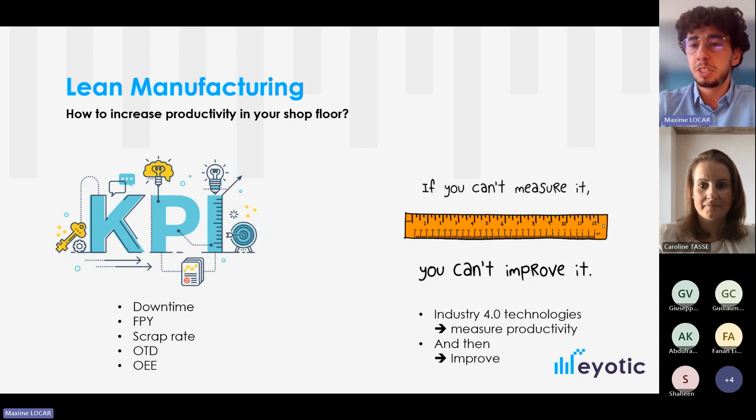As in the lean manufacturing method, the first step is always to measure the KPIs. We can't improve if we don't measure the KPI first. For this, I will use different examples that I saw in production in France and in Europe of measuring performance and improvement of performance in the shop floor using different Industry 4.0 technologies.

Concerning these technologies, I'm sure you know Industry 4.0 covers many different types of technologies, but today I will use these examples. I will speak about artificial intelligence, about robots and automated assembly lines, IoT and connected tools, and also camera visualization for quality checks and things like that.

So first, the first KPI I will explain is the downtime. As we can see here, the downtime is a stop during the production process. There are different types of downtimes.

We can separate them into two different types: the planned downtime, like breaks or planned maintenance, and the unplanned downtime, like a problem, a lack of material, a broken part, or something like that. This type of downtime is more complicated to measure and to improve, so it is on this type that we will focus today.

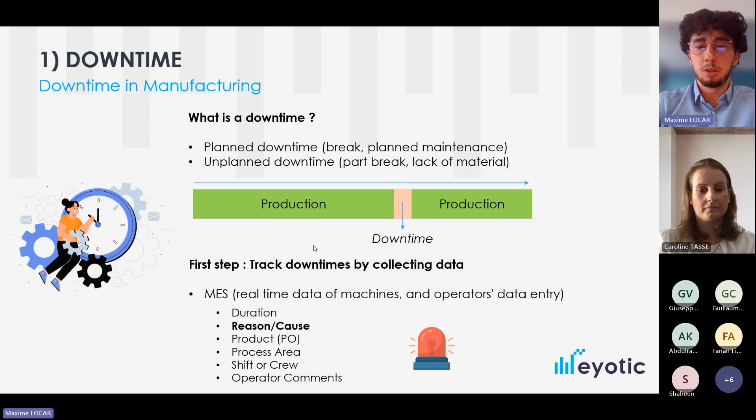But the method of lean management is here: the first step is to collect the data, so we can then monitor in real time and visualize it on the shop floor, so we know this machine is working, this one is not, and why. By collecting this data, the MES becomes a big database, so we can analyze it and understand the true problems of the shop floor.

By using an MES, you can really know where the leaks of productivity are in the shop floor, and you can analyze that and make good decisions to improve the process. The goal will be to anticipate future leaks of productivity and future downtimes by using predictive maintenance to prevent them and continually improve through these methods.

So this was about the MES. To go further, the goal is to connect the MES to different Industry 4.0 technologies like robots, IoT sensors, or video analysis. This allows people to have better data, and the better the data, the better the analysis you can do, because the goal is really to know the truth of the workshop.

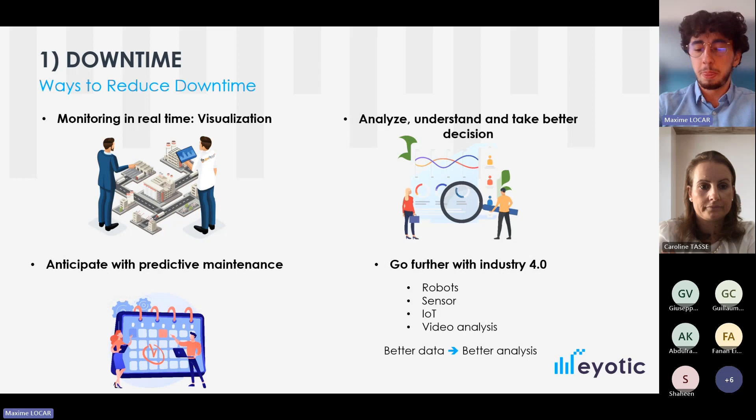But I will use a concrete case, which will be really good for you to understand this. I will speak about one of my customers in France, a crane manufacturer. For them, we were doing an Industry 4.0 project to connect a machine, an old welding machine with a PLC from about the 1980s.

On this machine, all the downtime was collected only manually on paper. Our project was to use an acquisition box to connect this machine to our MES. The first goal wasn't to measure downtime, but to measure intensity and have real-time data like we can see on the screen.

But we were here, so we also added the measure of downtime automatically because we were connected. So these customers can actually know in real time the downtime of these machines. By using paper and manual downtime tracking, they were expecting a production rate of 80%.

In reality, by connecting to the MES, the production rate was about 60 or 70%. By being connected and having the real data, they saw the reality was not what they thought before. So they had to adapt and analyze where the different leaks of productivity were with the MES, and they saw that the principal leak was during material supply, when the operators wait for materials.

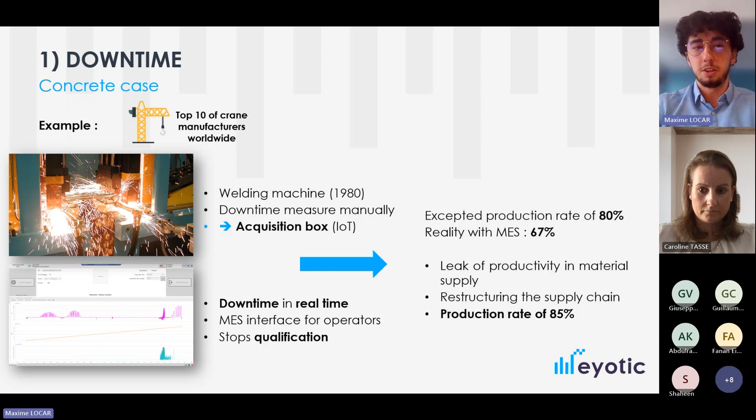Of course, the quality check can be really different, depending on the final product. It can be a weight measurement, a dimension, a composition. It can really be a lot of things, depending on the final product.

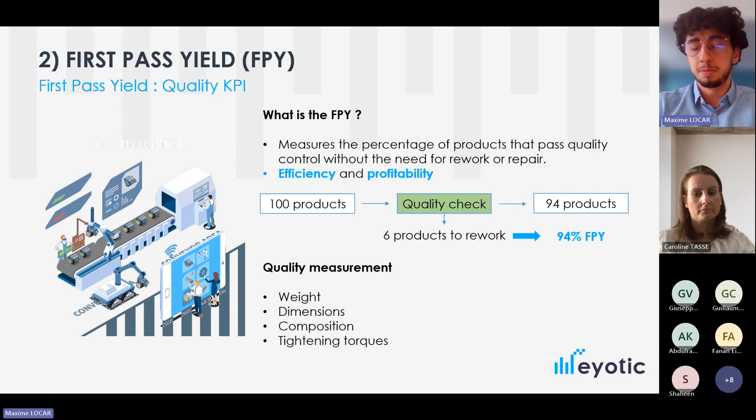To measure it using different Industry 4.0 technologies, there are different steps. The first step can be to connect with the MES and have a quality check done manually but digitally, like in the photos here, where they can directly type in the quality check. But you can also connect the MES to other technologies and go further into the details.

I want to give an example of a customer who asked us to connect this type of connected torque wrench to the MES to automatically process the quality checks. The MES also directly knows the data from these tools, and it's better—it's faster.

There is also a side benefit—not directly improving performance, but still a benefit from using this type of process. It's for traceability. By using this type of technology, an industrial company will know at the end of production that this operator screwed this bolt at this torque, at this time, and the bolt came from this supplier. All the data collected during the process will be stored in the MES and accessible anywhere, anytime. So traceability isn't a direct improvement of productivity, but it's also a benefit.

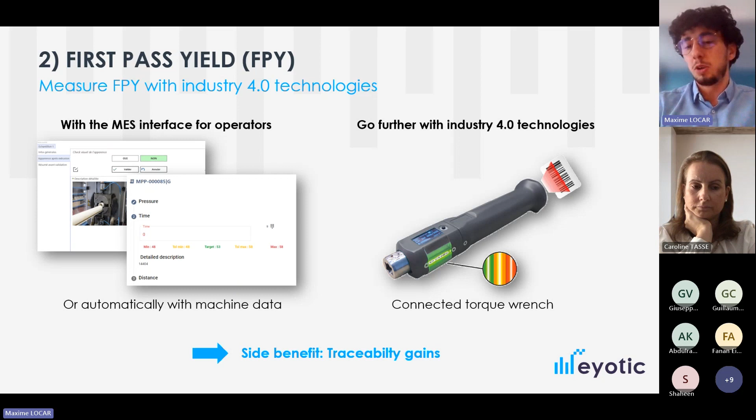To finish with this KPI, I'll use a concrete Industry 4.0 case. It's again one of our French customers, a military company manufacturing boxes with explosive powder inside. It's a big automated assembly chain, and they have to do quality checks on the weight of each box.

When we were there, there was a project for a robot that automatically weighs each box and directly sends the data of each quality control to KM Prod. In the MES, we can see all the different checks, with different alerts when the quality check isn't good.

There's also a direct alert, and the goal is really to prevent problems before they happen by seeing trends. We can see here the blue line showing a trend that the weight of each box is increasing more and more. At a certain point, the MES will directly send an alert or stop the production process before having a scrap or a problem.

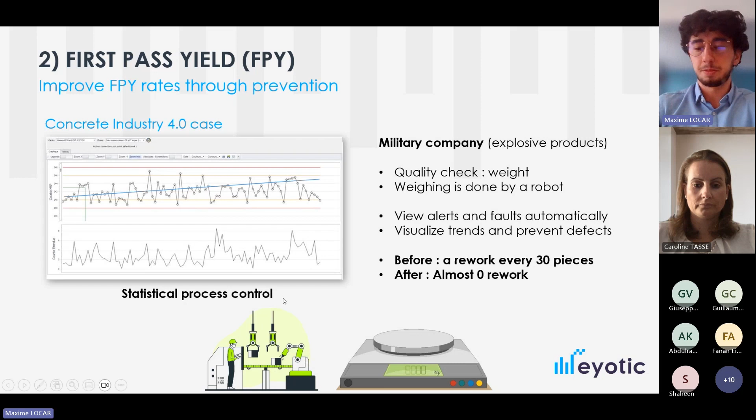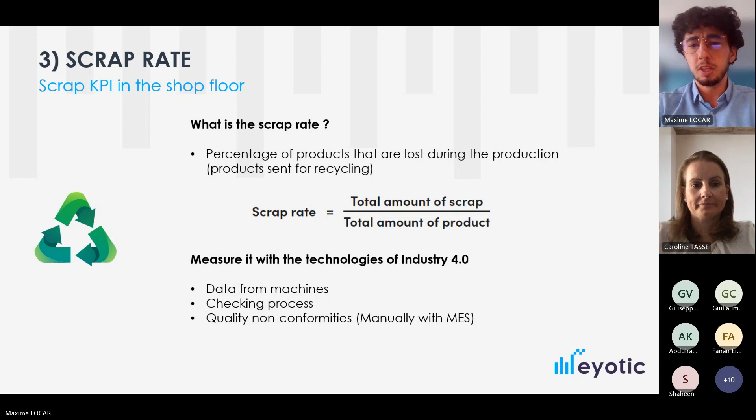Now I will speak about the scrap rate. It is the next step of the FPY. The scrap rate is all the products which are lost during production and which are going to be recycled. We can measure it in different ways, but with Industry 4.0 technologies we can go further.

The first step would be to have an MES and an operator that directly and digitally types the data of different scrap validation.

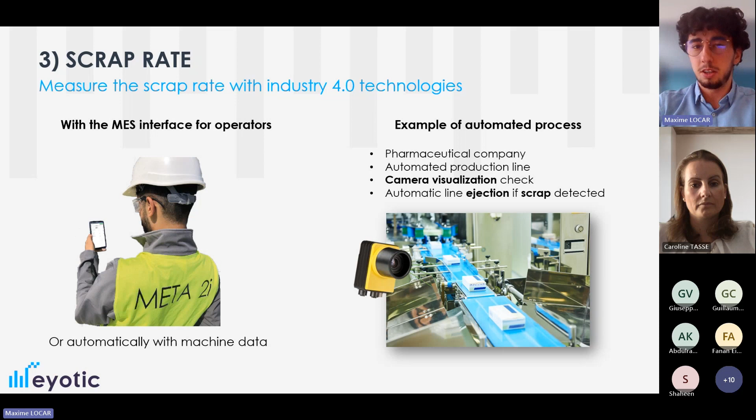But we can go a lot further, using the example of a pharmaceutical company in France which has an automated production line. On the line they have different intelligent cameras with visualization, and the goal is to do the quality check directly from the camera. The camera checks if the barcode is good, and if the quality check doesn't pass, the product is automatically passed out and scrapped. So the quality check was totally automated in the process, but again all the data is stocked in the MES to analyze later.

I want to use another concrete case to explain how the scrap rate can be improved with different Industry 4.0 technologies. I'll use the example of a water jet cutting company, also in France, where our product was being implemented. There are a lot of things to do, but they know they have a really big scrap problem because they are using titanium parts, which is a very expensive material, and the cutting process by water can be very long.

So they can't always have a person there to verify that everything is going well. They need water but also abrasive in the machine, and if the mix isn't good, the piece will immediately be wrong and go to scrap, which is really problematic because titanium is really expensive.

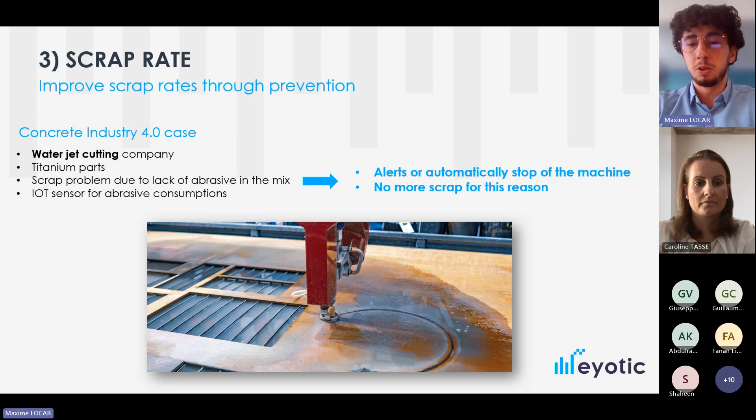So what we did is use an IoT sensor directly in the machine to know the quantity of abrasive in the mix. If the sensor detects there will be a problem, a lack of abrasive in the mix, automatically there will be an alert to the manager of the workshop. And if the problem isn't resolved by the manager, the machine will be stopped by the MES upon receiving the information from the sensor. So there is no more scrap for this reason. It's a really good thing for this customer because it was a really expensive problem for him.

Now I will talk about on-time delivery in Industry 4.0. On-time delivery is a KPI that lets us know if we are on time with all deliveries and if the planning is going well. Again, there are various different ways to measure it in a workshop.

It can be done with an MES or a scheduling module in general, where the goal is to plan all the POs from the MRP to create a sequence of production that will be distributed to posts for all the operators, who can then launch it in production. During production, we check the beginning and end of all operations, so we can know in real time how it's going and if the scheduling is good or not. It is the first step, but we are doing it for a lot of customers.

We can use an artificial intelligence motor and connect it to the MES to go further and have intelligent scheduling. The goal is to be more efficient in creating the sequence of production in different ways, by being better at procurement, material supply, operator productivity, or other data depending on the customer's needs. The goal is to be more efficient in creating the sequence of production using artificial intelligence, aiming for continuous improvement, because the motor will learn more and more along the way of production.

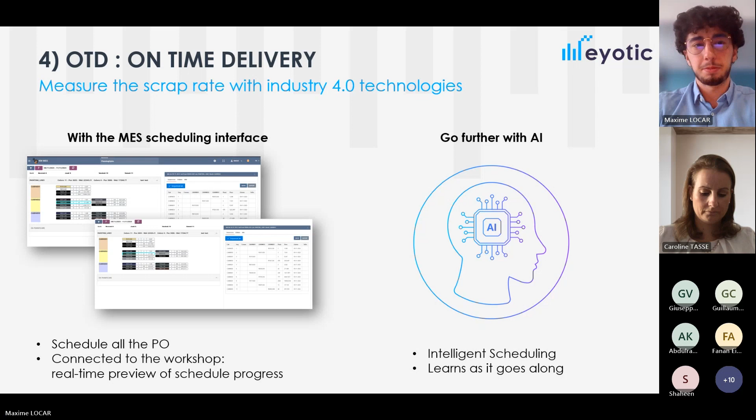Before using artificial intelligence in scheduling, the on-time delivery and the delivery time told to customers was about 5 weeks, because in reality they didn't know in real time how production was going, so they told everybody 5 weeks for each product since it was simpler.

The first goal was to use a scheduling module without artificial intelligence, so they could know in real time if there was a problem in production or a lot of work to do. With this, they saw that in reality the average delivery time was about 3 weeks rather than 5, with the same OTD, just by measuring it.

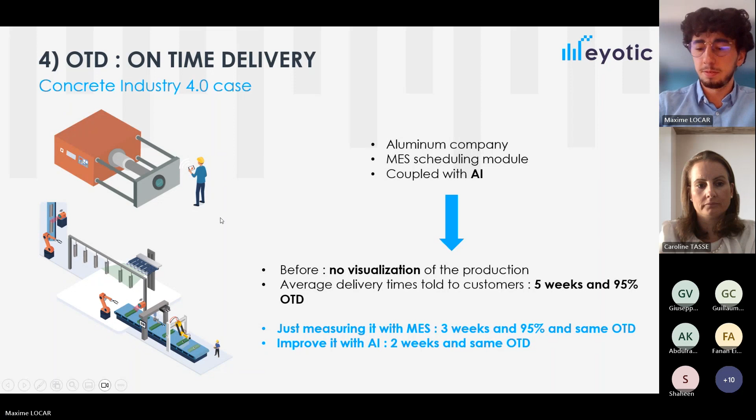To finish, I want to talk about OEE, because as you probably know, OEE is really the global KPI of performance for a factory, and all the different KPIs we saw before lead us to this KPI. As you can see, OEE is about availability, performance, and quality.

It's also very important to say that OEE is not only for machines; it's really the overall equipment effectiveness, so the people and the different equipment in the workshop also influence the OEE.

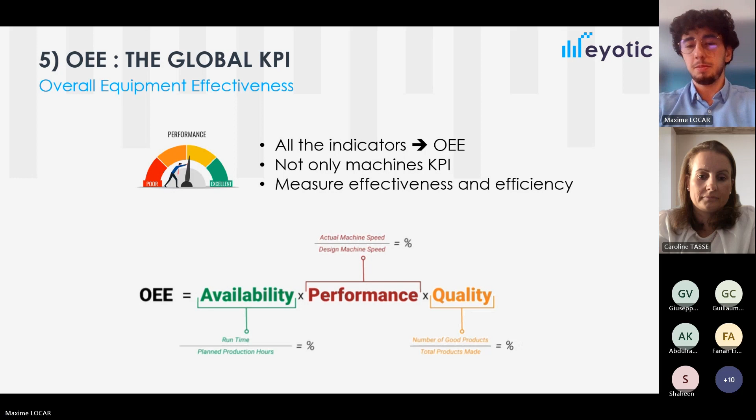To finish, it's really good to use this example, because you'll see that everything we saw before is used here, and that OEE is really the global visualization of performance on the shop floor.

That's the reason we were working with them, and they did a lot of things. We were there for the MES, but they also used some robots in the workshop for availability, which allowed them to have better opening time and work more hours during a day with the best productivity.

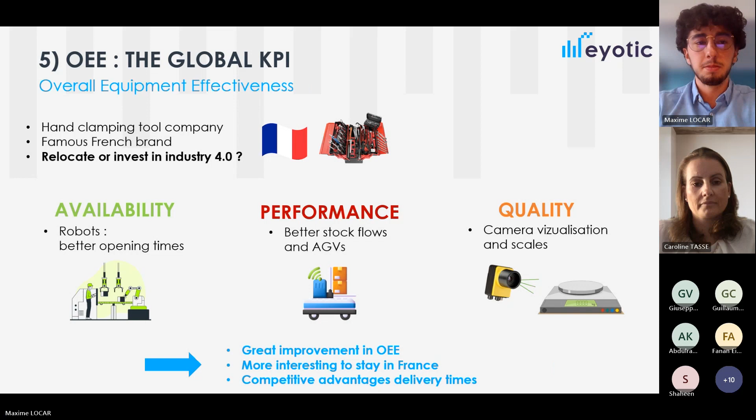Just to conclude, I want to talk again about lean manufacturing. As we saw, the first step is always to measure, to use technologies to measure first the productivity in the workshop. This way, we can analyze and see where there are leaks of productivity, and that really depends on each shop floor and each process. Then we create action plans using different technologies to improve these problems and continue. The end is about control, but I will say prevent, because with this MES technology we can prevent future problems and continue the cycle of lean manufacturing.

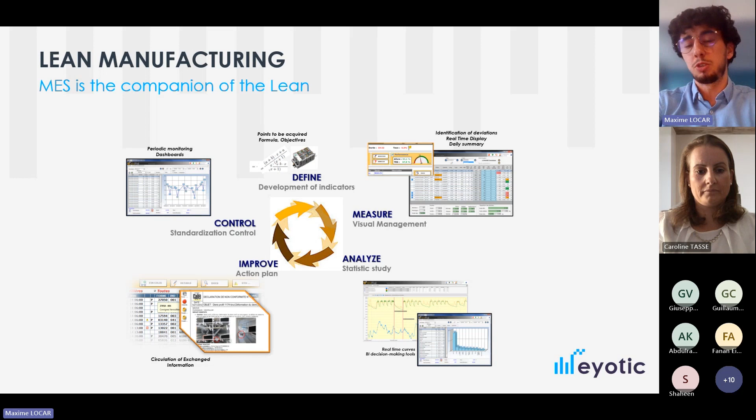So it's okay for me. Maybe Caroline, you want to add some points, but we are here and able to answer your questions now.

Your microphone is off, Caroline. Thank you, Maxime, for this insightful presentation.

Before moving to the Q&A, I'd like to give a bit of a conclusion as well, if you'd allow me. I think it's worth highlighting that KPIs are important to measure where you stand and how you can improve, and that's critical to improve productivity on the shop floor. Now, whatever KPI you're choosing, it's not just about the metrics. It's about the parameters to consider to calculate those metrics. It's also about data relevancy, and the fact that we can capture real-time data through automation and then have a large, vast amount of data to deal with.

It's about data integration coming from different systems. It's about the wealth of industrial intelligence that you can gather from your shop floors. And all of it basically allows you, by having this massive quantity of data coming from different sources, to leverage industrial intelligence technology to compute that vast amount of accurate and real-time data and to allow correlation.